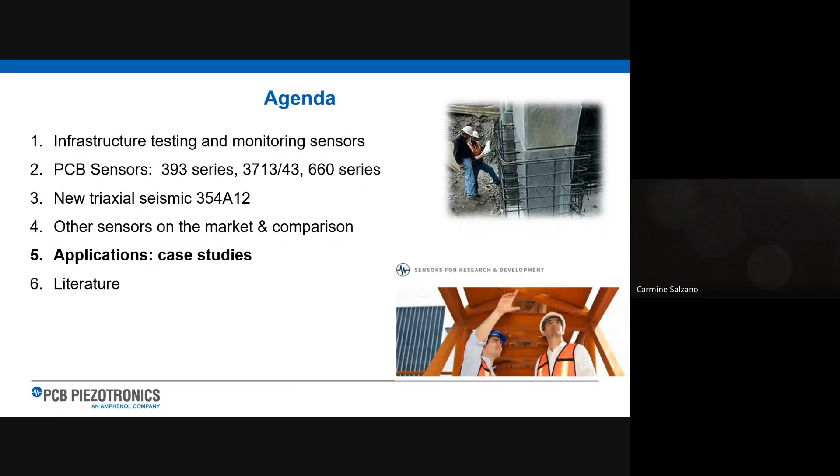Then we will have point four, a very quick overview of two of the most common other sensors used in this kind of vibration test and monitoring in the market. And then, as I said, we will see 26 case studies. So it's quite long because of these 26 case studies today.

Okay, so the first part is obvious. Why we do these measurements in infrastructure. There are many kinds of reasons why. First, to test infrastructure, or maybe to perform monitoring. You can imagine on some monuments, or for seismic, or maybe for certification, or even simply for research scope. So there are many reasons, I would say very important reasons.

The question is which kind of system we use for measurement. We use typically a sensor with a cable and data acquisition. Of course, I will concentrate on the type of sensor, because the sensor is the one that transforms the oscillation into an electrical output, which can be read easily by any data acquisition.

I hope it's enough, or should I speak slower, Nicholas? Should I speak slower? Maybe a bit slower. A little slower, okay.

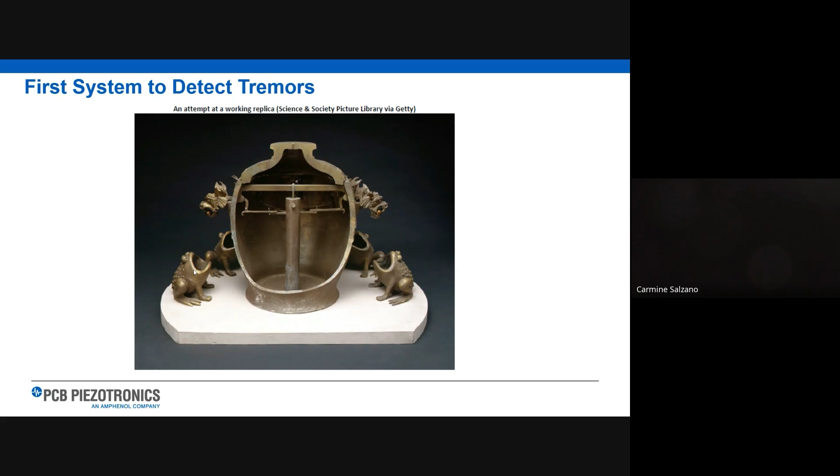Well, after a few days, the time for a guy to move by horse from one city to another, he arrived and announced there was an earthquake a few days before, exactly at the time when the ball dropped. So as you can see, this is just a curiosity about where the first, let's call it, sensor was developed. Of course, today we have different types of modern technology. I will concentrate on a couple of technologies only.

First of all, the piezoelectric one, which I hope is familiar to most of you. We have silicon dioxide, mainly quartz, or other ceramic piezoelectric materials, which, when we have a force acting on them, like an acceleration, generate an electrical output.

This electrical output is high impedance. So typically we have a MOSFET, a microcircuit inside the accelerometer, to convert to low impedance voltage output. And this is one of the most common. We have another technology which is capacitive, we'll see later.

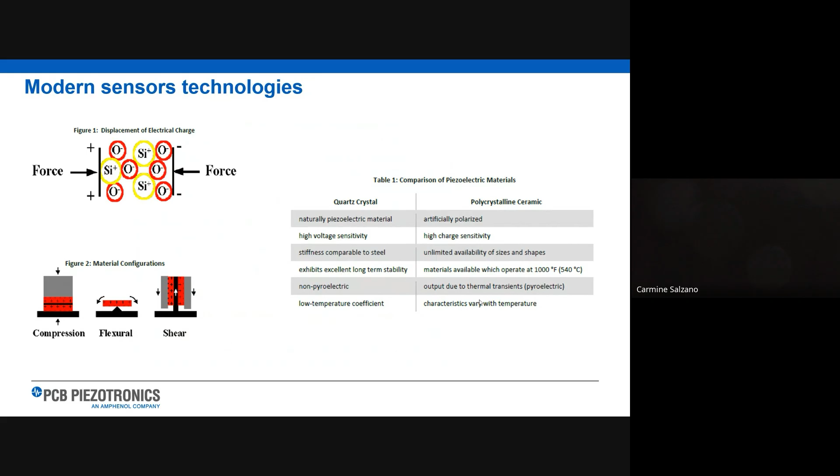The piezoelectric is especially for this infrastructure where we don't have associated high temperature above 120 degrees Celsius. Then in this case, an ICP sensor with the electronics inside and low impedance voltage output is very, very common. Most of the piezoelectric sensors, which are very robust, can measure in any type of infrastructure at a very low level, which means they can reach very high sensitivity to measure down to, let's say, micro G.

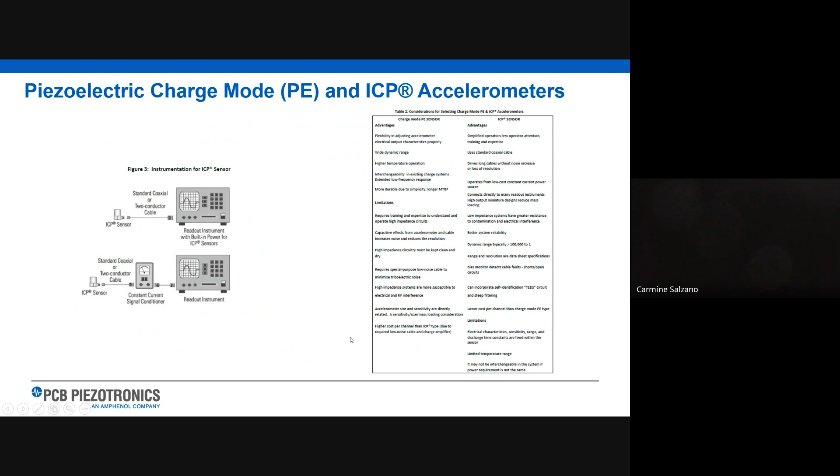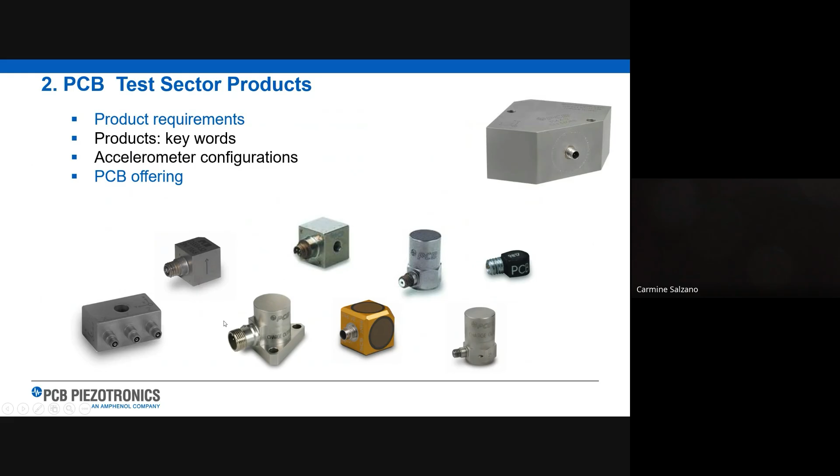What does it mean? If you have an accelerometer which is able to measure down to micro G, it is already good for most of our needs. Maybe not nuclear tests, but all the rest are fine.

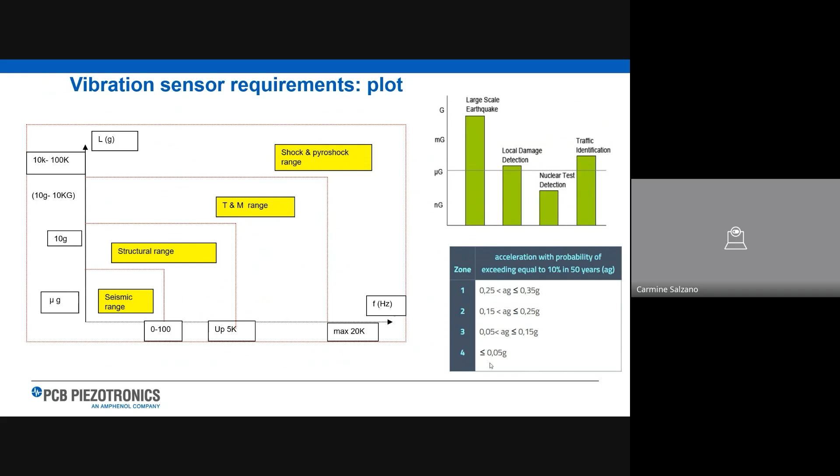Then I found another interesting plot, another interesting piece of information here on the right side, bottom, because these are the acceleration levels which buildings in a seismic area in Italy, for instance, need to resist according to law. So as you can see, the minimum is 0.05 G. So in this case, there's no need for seismic monitoring and tests in these seismic areas to measure below 0.05 G. So not even micro G. This is very important information, at least for the level of vibration to measure.

Because look at this. If you want to make a list of requirements, of course, we know that it's maximum 100 Hertz and the G range is for sure not below micro G. The frequency, I already mentioned, maximum a few hundred Hertz, but the question is, do we really want 0 Hertz, or do we want very close to 0 Hertz?

Remember, we are measuring motion. We are measuring a structure, can be a big building, can be a bridge, can be anything which is big and is moving. When it moves, you have a frequency even very close to 0 hertz, but you don't have 0 hertz. And therefore, most of the applications we can cover not with the capacitive sensor technology we have, but with the piezoelectric ICP.

Another important thing is robustness. You can imagine a hermetic sensor, or if not hermetic, exposed during monitoring. Then robustness is also important for shock, because if you drop a high sensitivity accelerometer on the floor, you can break it. The size is not so important. The price, of course, depends on the number of channels we need, if it's a test or if it's monitoring. And then, of course, the ability to use long cable.

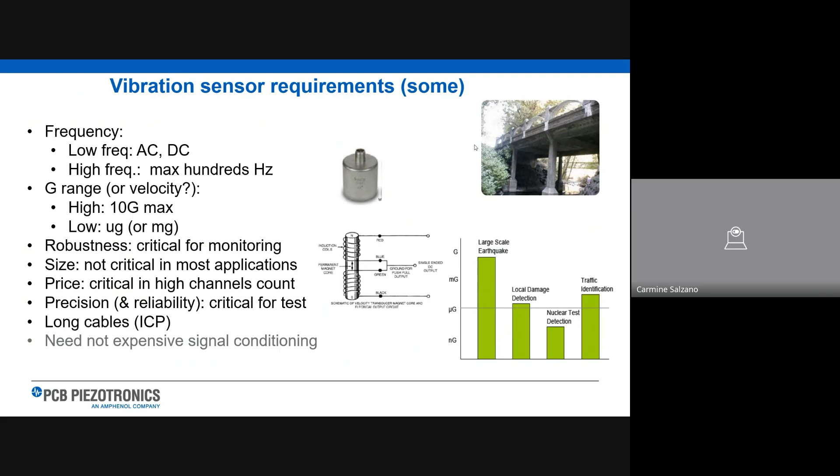Now, why do I call it micro vibration? Because it's the accelerometer with high sensitivity. High sensitivity, we talk about from 1 volt to 10 volt per G, able to measure down to micro G.

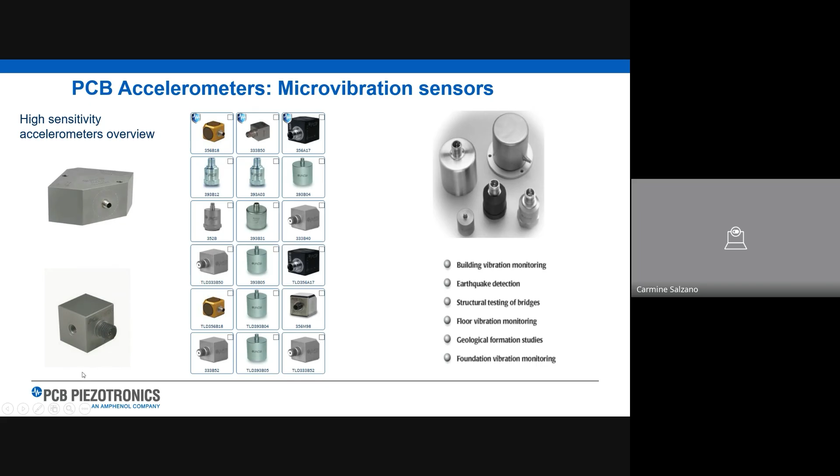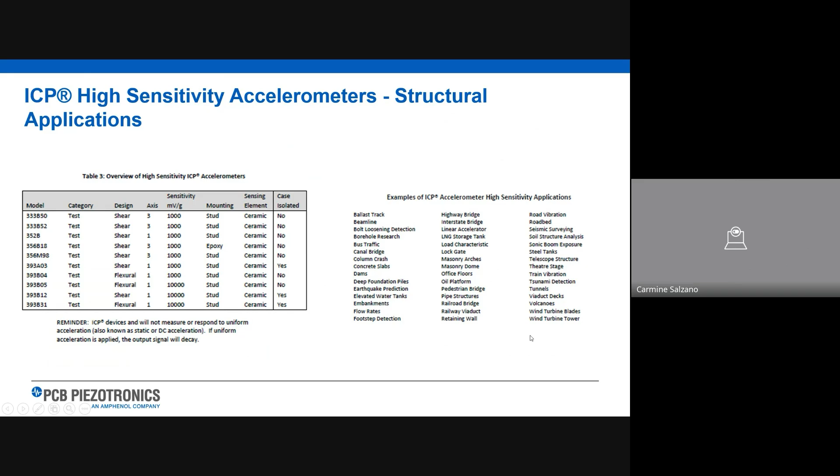As you can see, most of the applications of these sensors I show you are in civil structures. Can be traffic jams or dams or buildings or infrastructure like viaducts or tsunami or railroad. We have many infrastructure applications. And of course, these are the primary standard off-the-shelf single axis accelerometers. You can see typically 1 volt per G, 10 volt per G.

You can see the frequency, 0.06 hertz. So really close to 0 hertz. You can measure, I would say, every type of motion. Of course, at 0 hertz displacement you are not able to measure. Otherwise, you are able to measure down to micro G level.

Okay. And this is brand new. I would say this development that was released this year is a triaxial accelerometer. You can see the size. The size is very small compared to using 3 accelerometers of the same size. You could use these 3 axes instead of this one. That's why it's very convenient to use this accelerometer.

You can see the size. And the level is 8 micro G, already mentioned. So you can measure from 8 micro G, and you can see the frequency, even 0.06 hertz, which means most of the motion in the infrastructure you can measure in the 3 axes. This is really the new one that we have today. I am pleased to present it, probably for the first time in a webinar, officially released today in a small number of pieces. In the future, as production goes ahead, we will have a large quantity available.

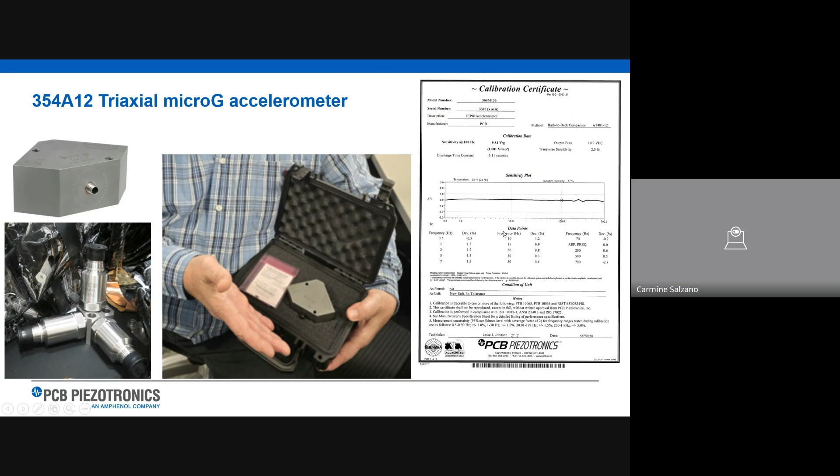However, we have the opposite. We have some very small sensors, very low price, 1 volt per G, this accelerometer here, naked. Just the accelerometer itself, it needs to be protected in a case. But the price is very low because it can be embedded in any application. Of course, this is primarily for monitoring, not for testing. But sometimes when you want rough results but in large quantity, you can use this one.

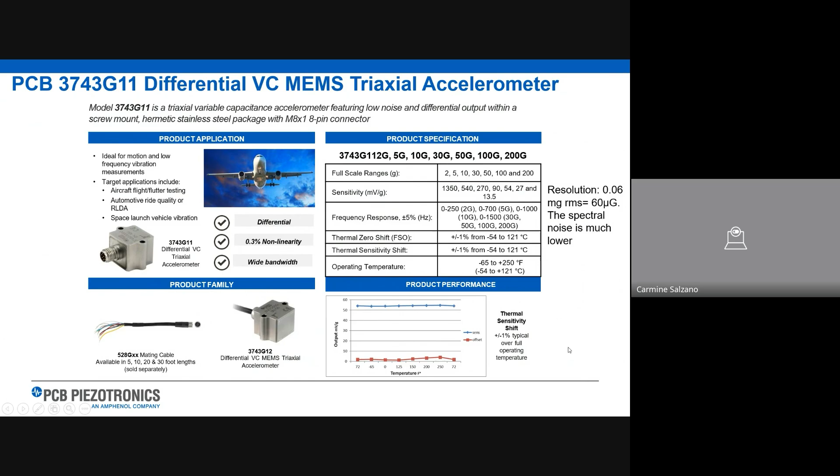And this is one of the latest, the triaxial, which can work single-ended or differential. We don't have time to explain the difference, but it is an accelerometer measuring from 0 hertz. And this is 60 micro G resolution, so the minimum level. However, the triaxial piezoelectric is 8 micro G, so one order of magnitude of difference. Of course, I will not mention force sensors and other sensors like strain sensors, because these are sometimes part of the 26 different cases I'm going to show.

Now, before going to the 26 different cases, let me show you the two typical ends, two typical sensors. The low end typically uses a geophone. Every geologist probably uses this geophone, which is really rough.

The cost is very low, but it is very limited in frequency. Any frequency they can measure, it just gives an idea. Our sensor, I showed you before, the embeddable one, has a better characteristic and probably the same price level, not exactly the same price. So eventually you can evaluate the embeddable.

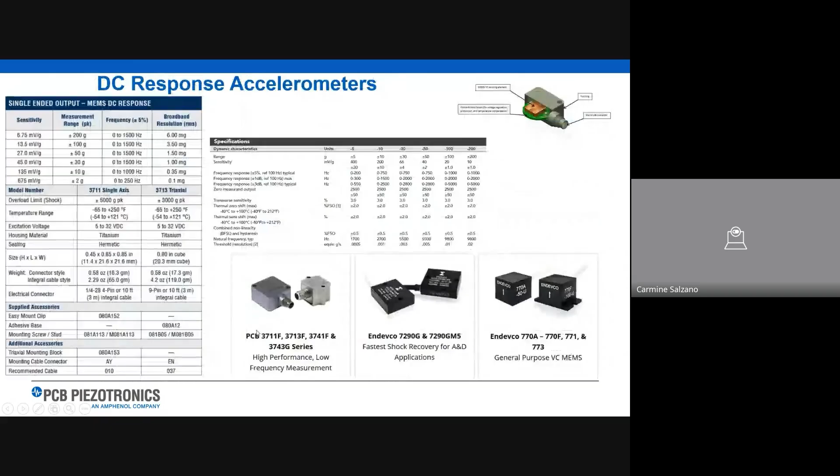Okay, I hope there is no urgent question, because now we go to the last and the longest part of this presentation today. Nicolas and Nico, any comment?

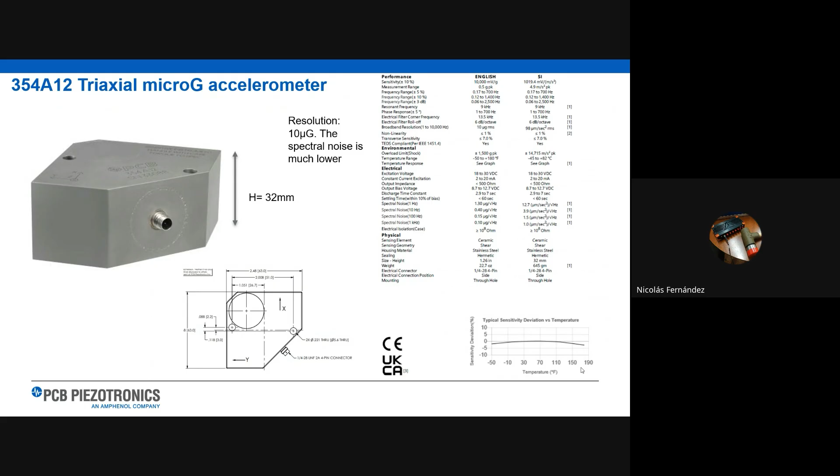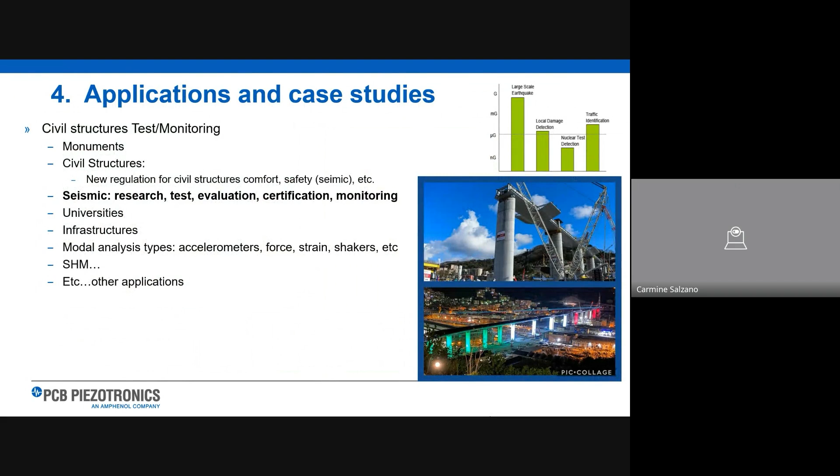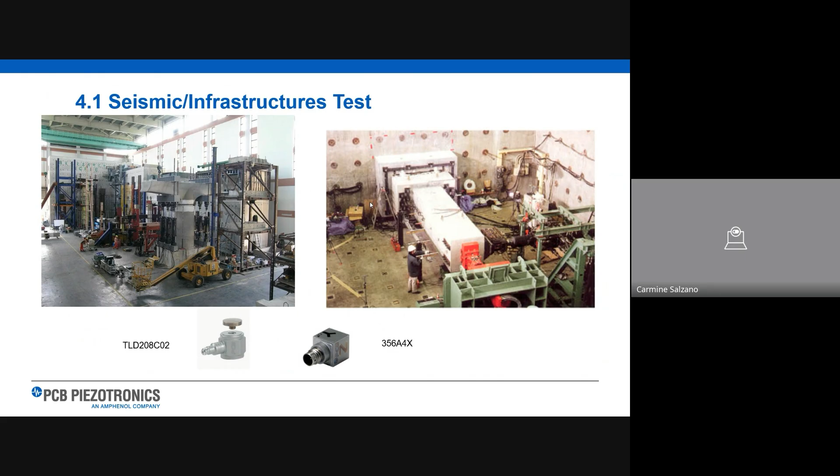Okay, now we see the application. Yes, many applications. The first one, obviously, is a test in infrastructure in a typical lab, right? It can be a testing lab, or it can be the lab in a university. In this case, of course, you need a typical high sensitivity accelerometer, but also a force sensor, a sensor that is able to measure with the same ICP technology the dynamic force. Because of course, in the modal test, you need to excite the structure, it can be a sledgehammer, it can be any device, and then measure the force you give, and then the accelerometer to measure.

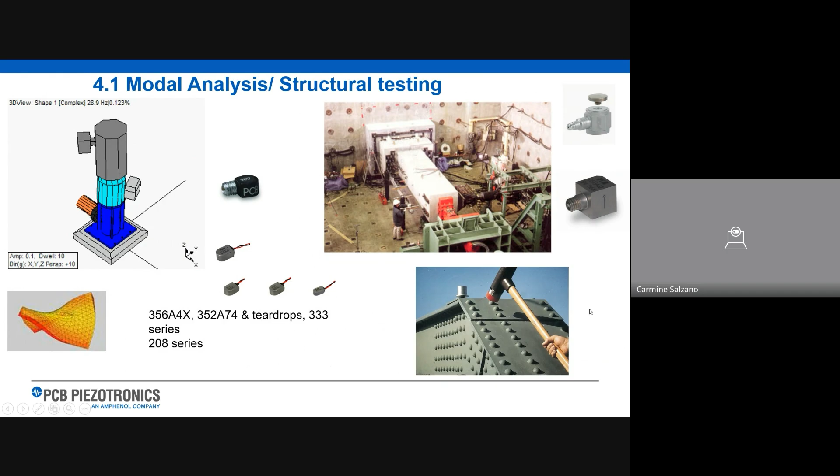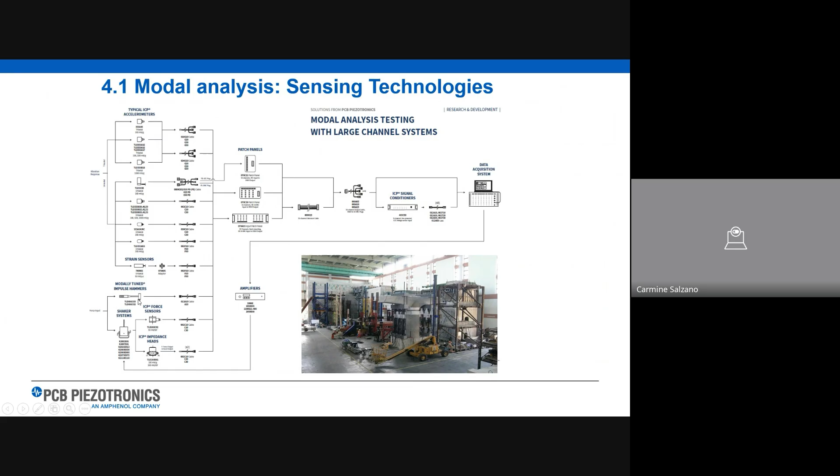And this you can imagine as a pump or any structure. You can see the sledgehammer to excite the structure, and the accelerometer doesn't need to be 10 or 1 volt per G, it can be even 100 millivolt per G to measure the response. And of course, we have plenty of these sensors. This is a very general introduction, because the excitation method can be hammer or shaker. All these sensors are manufactured by PCB Group. You can see the shaker is the best, I would say, excitation in the modal test, and then different types of hammers.

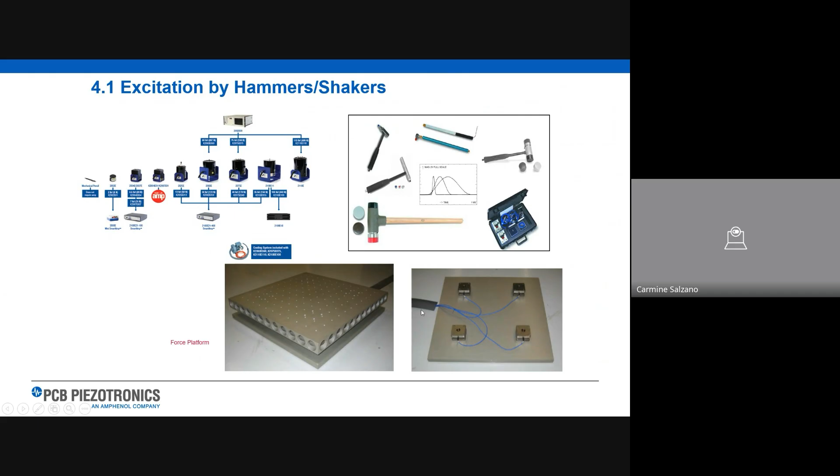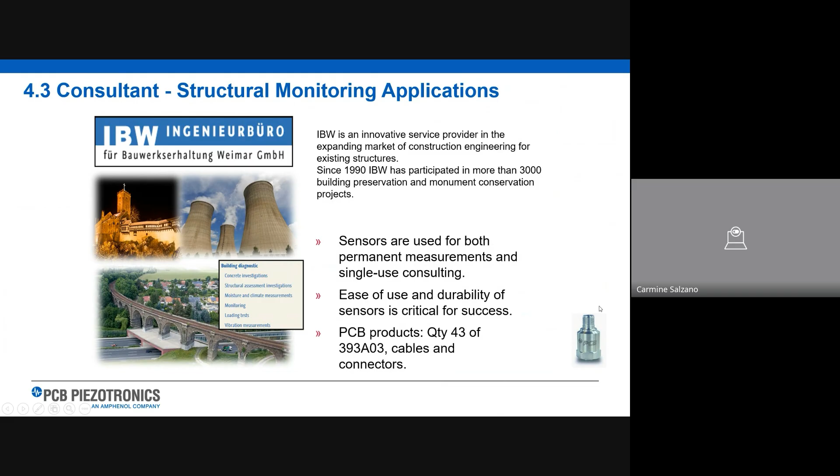These are real applications. Another real application is very common: this consultant in Germany used 43 accelerometers for permanent monitoring during consultation on building preservation and monument conservation projects. As you can see, these are very common applications in any country, not only seismic countries, but every country that wants to preserve its monuments.

This is in the US now. This is the most equipped monitoring building in the world. It is covered by a paper. You can see the link of the paper. When I send the presentation to Nicholas, he will send it to you.

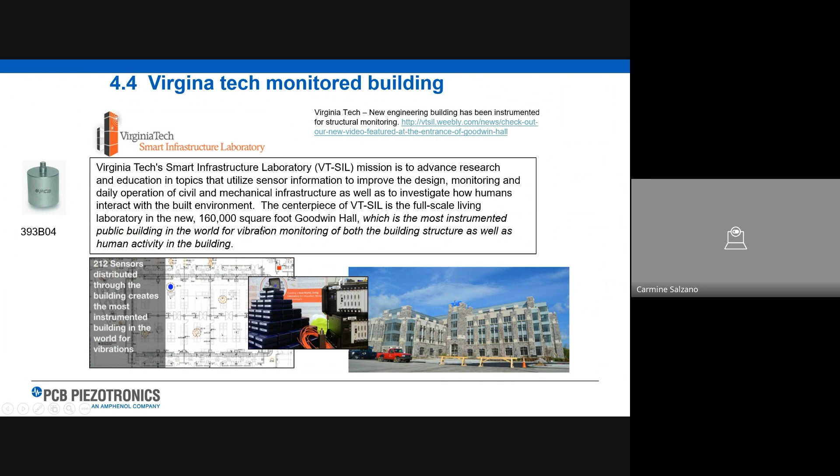In this presentation you will see the link and can download the paper. You will see that they use 212 of the 393B04 from PCB, 10 volt/g, for permanent monitoring of this structure, which is a big structure of Virginia Tech. So very big. You can imagine the 160,000 square feet of Goodwin Hall. So a very big structure, permanent monitoring.

From this building, we go to another building, in Italy this time. I don't know if you remember, 20 years ago, something like that, there was a big earthquake in the middle of Italy, and the student house collapsed. And then there was a new building for the student house. You can see the pillars.

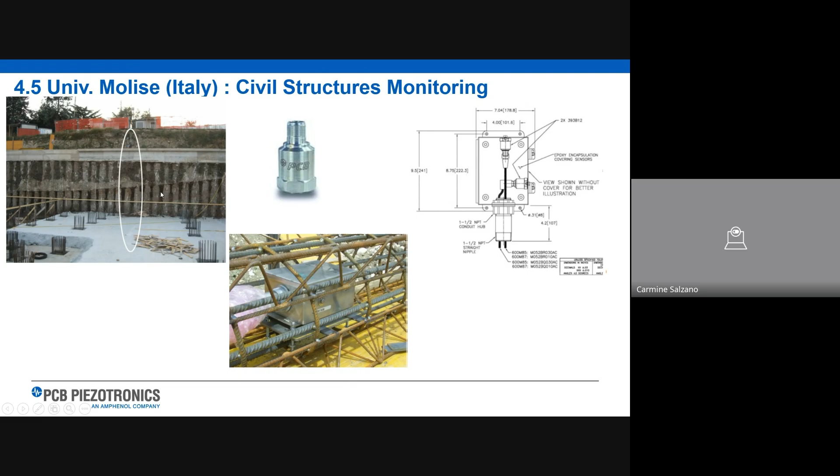In 2 pillars, we decided to embed 2 of the 393B12, 10 volt/g, very robust with MIL connector, in a box in a pillar. This pillar was injected with liquid cement, which then solidified, and it's still there measuring the level. This is a paper you can find on our website, which I contributed to, because I followed the project of these 2 accelerometer units measuring 2 axes in each pillar. And still today, after 15, 20 years, it is still working.

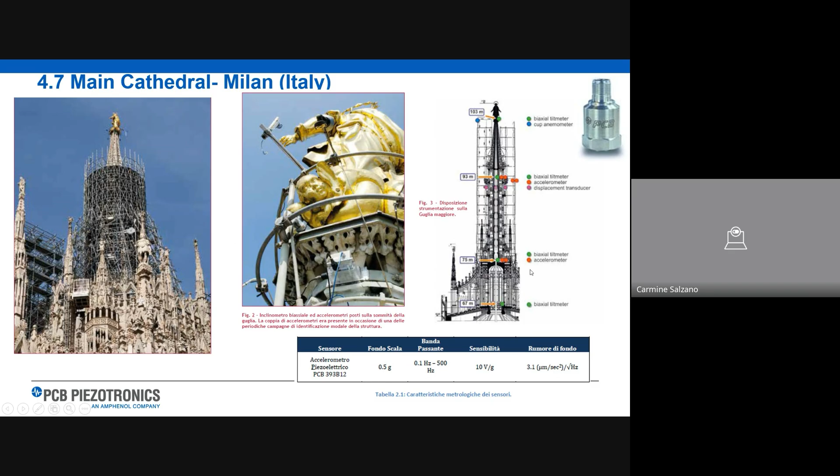But another very popular, probably the most famous monument is the main cathedral in Milan. You can see the statue of the Mother Mary needs to be monitored. We have this accelerometer 393B12, again, used by the consulting engineers to measure at different levels of the column, including the Mother Mary, for permanent monitoring of, I would say, this tip of the church.

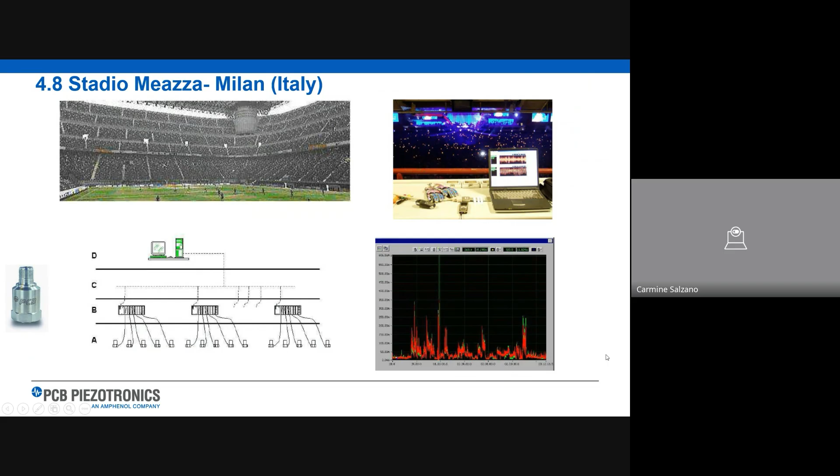Still in Milan, but this time the football stadium, but they used the 393B12 not for monitoring during a football match, but during a U2 concert, a rock band concert. During a concert, you can imagine how many people jump, and they used this accelerometer to monitor during the event, to make sure that the structure will not be overstressed.

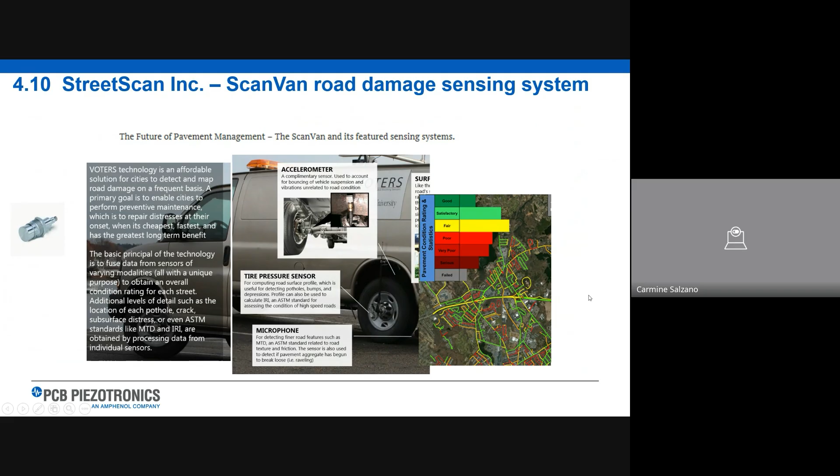Still in the US, but this time for road assessment, using not only the accelerometer, but also a PCB 106 type pressure sensor inside the tire. Because of course, the tire pressure changes due to vibration when moving on the road. So with different dynamic pressure measured, you will have a different condition of the road, and then you can map the status of the road with different colors. That's another very interesting application from one of our customers in the US.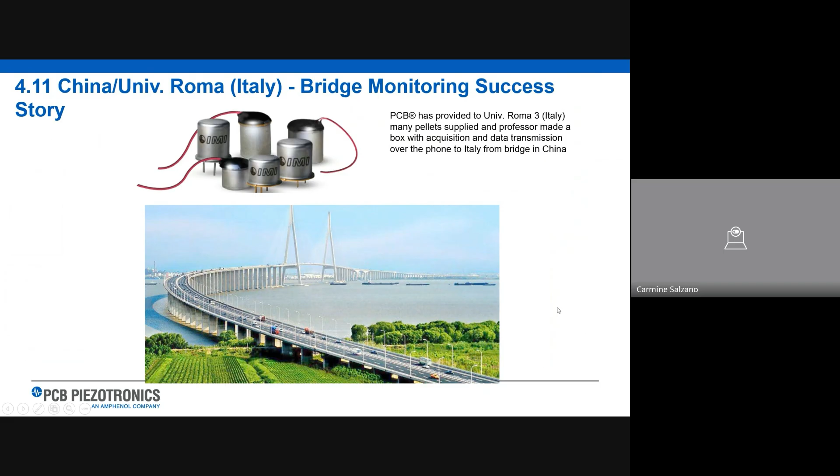Still in Italy, but this time on a bridge. This is a paper you can Google and find, as I did, because I was not aware. I simply Googled it, and I found that this bridge is very big, on the biggest motorway in Italy. Using the 393B12, the modes were found. And this is very interesting because for this large bridge, the minimum frequency is 0.93 hertz.

Well, I would say this probably is the best proof of what I said at the beginning. So even for a large bridge like this one, the minimum frequency is 0.93 hertz, which means that usually you don't need a DC accelerometer, right? We have the DC accelerometer, but in this case the minimum frequency of 0.93 hertz can be easily monitored and perfectly measured by this 393B12, which is a dynamic ICP accelerometer starting from 0.15 hertz.

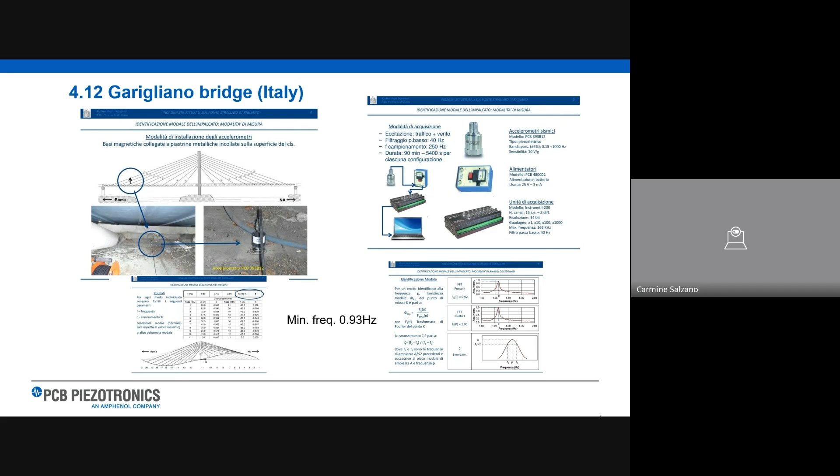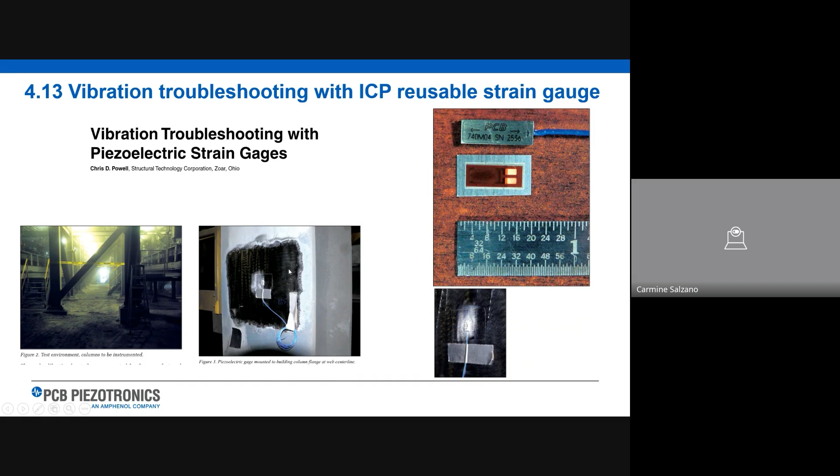However, this sensor is, I would say not hermetic, but epoxy sealed. Inside you have a quartz plate. So mounting on two opposite flanges of each pillar, they assessed the status of the pillar during construction work. And these are the results. One column on the left, this one is a column. You can see the time, and this is a zoomed time history. You can see the two sensors, red and blue, have the same frequency and the same level. Therefore, this is clearly axial loading of this pillar.

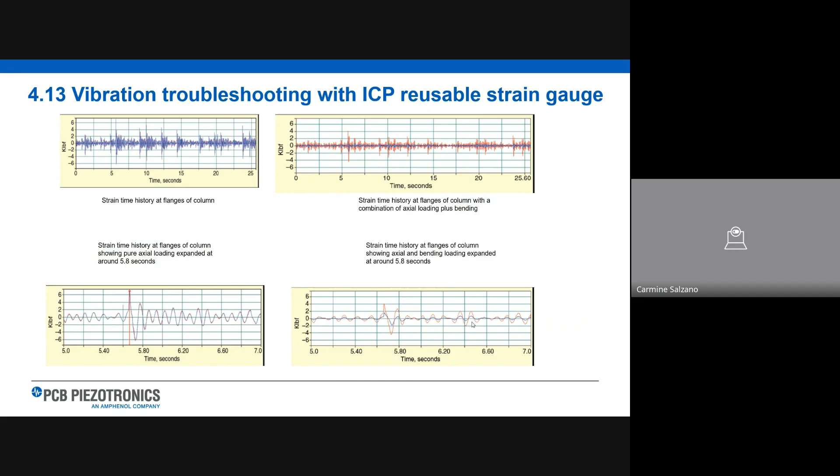Another pillar with the two strain gauges on two opposite flanges. You can see from the zoom, you have the same phase but different amplitude. What does it mean? It means that this pillar has axial and bending loading. So a very interesting application of this strain gauge.

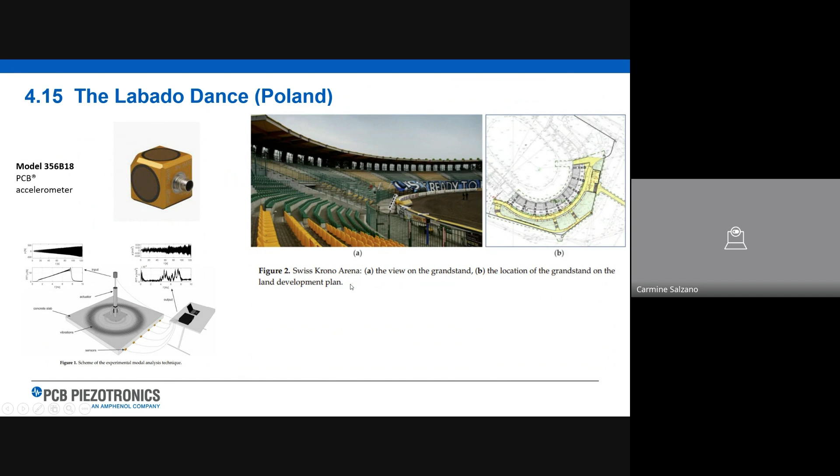Now we go to Poland. This is a Labado dance. This is a speedway race, and people dance a Labado dance, which means they hold their arms on each other's shoulders, so they are all jumping at the same time. You can imagine hundreds of people jumping at the same time, how dangerous it can be to excite the resonance of the structure. In fact, they used a 356B18, which is only 1 volt/g, not 10 volt/g, because you don't need to measure down to micro-g, milli-g is enough, since there are really some g during this Labado dance, right? So it was important to use many of these 356B18 during the event in order to control that no problem happened during the race.

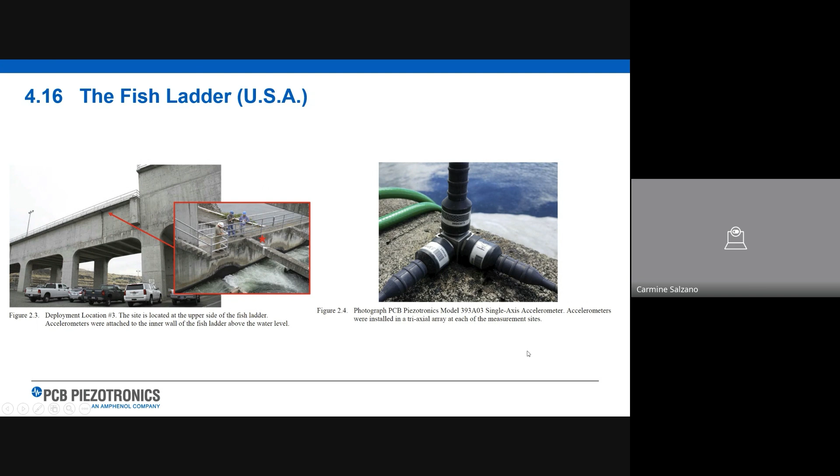Now in the US, there was another example. This is a dam. The dam was important because there were salmonids moving in the area. During maintenance of this dam, excessive vibration could disturb the salmonid navigation, right? So there was a triaxial arrangement, three single-axis 393A03 accelerometers, used here at the point with the red star, so that when the level of vibration during construction is too high, they can stop construction work so the salmonids are not disturbed during their navigation, because they want to make sure the salmonids can navigate, create eggs and grow up to be eaten, right?

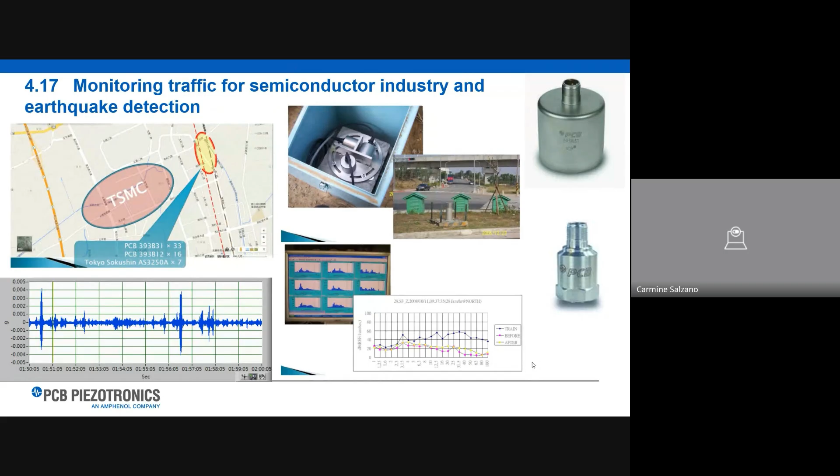So it's an excellent, I would say, multi-application case, because with the same sensor we are monitoring the railway traffic, the car traffic, and an earthquake in order to prevent any problem with semiconductor manufacturing. So it is an interesting application and covered by one of my papers on the website.

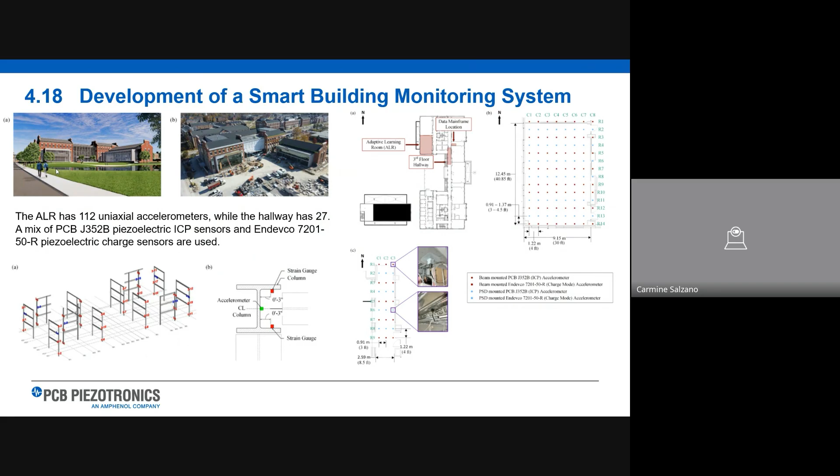Go back to the university in Tennessee in the US. They use 112 accelerometers. In this case, the accelerometer is 1 volt per G, and they use this large number for monitoring for two reasons. Structural health monitoring, and the other reason is human vibration, I would say the steps of the people, hundreds of students in the university moving around, which of course cause vibration. And they want to measure also this one.

They use these two sensors, strangely, one ICP and one charge output from Endevco. These are the systems they use for this permanent monitoring of the Tennessee University engineering faculty.

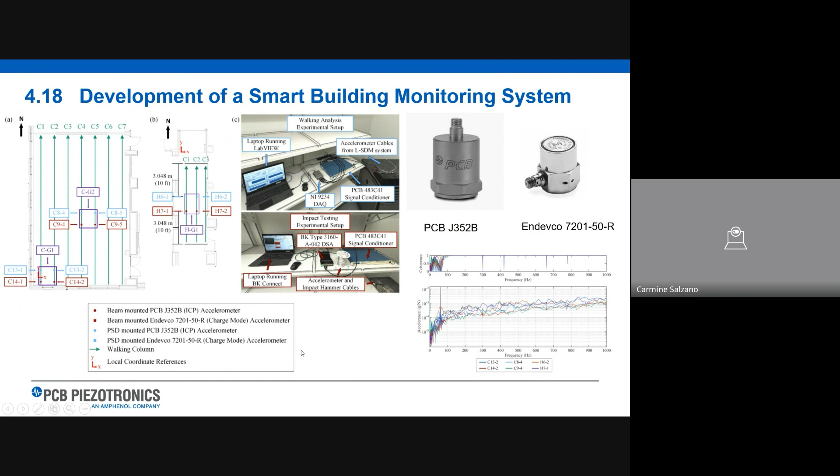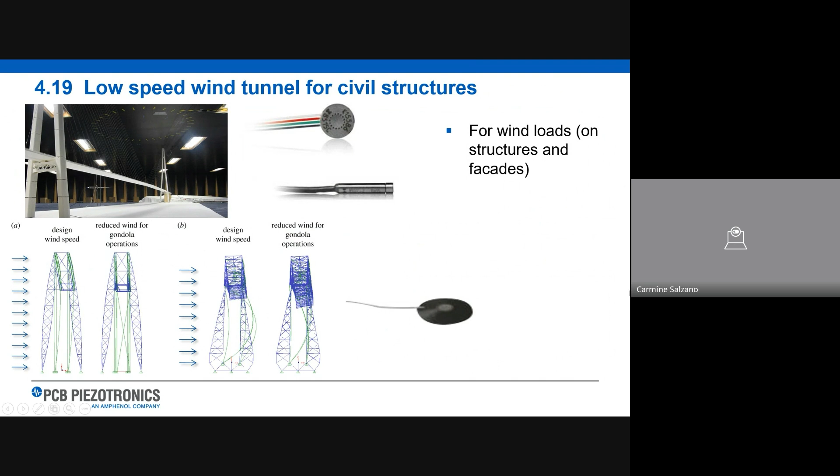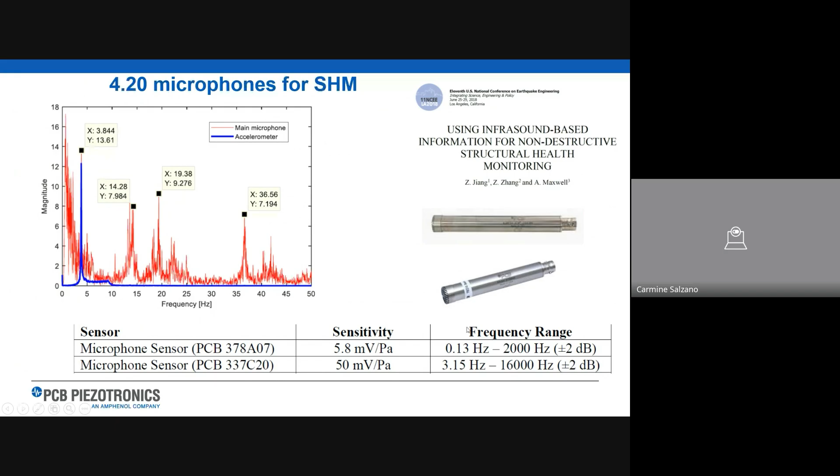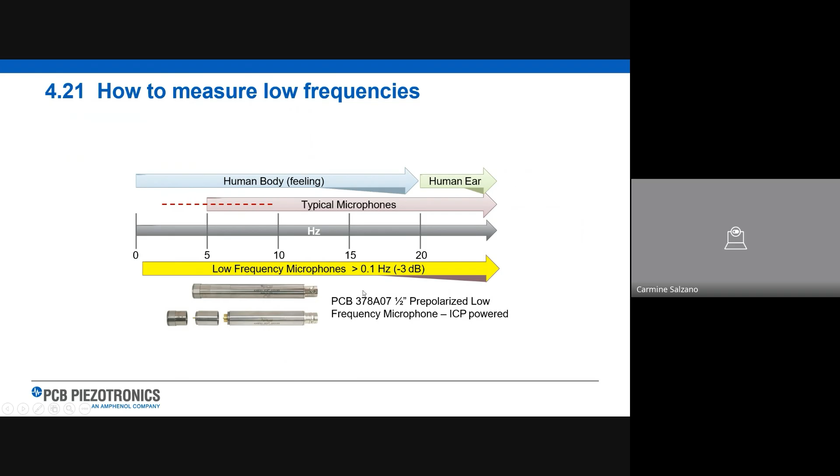But these low frequency microphones from PCB, since they can measure down to 0.1 hertz, can be used for many other applications by non-contact measurement. For instance, tornadoes, typically in the US, or wind farm noise, this is everywhere, volcanoes, right? Of course, nuclear, because all these events are very low frequency, much below the human ear. So having this type of microphone, they can easily be measured.

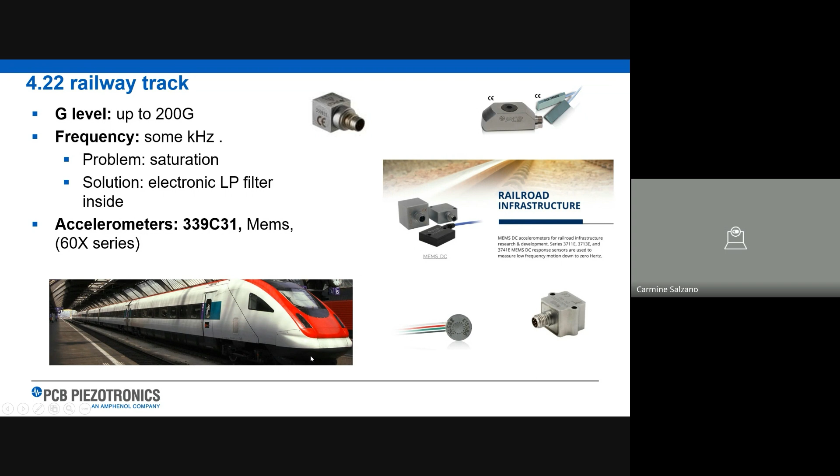On railway it's a different one. We don't need the micro G. In this case it can be some level of G's during passage of the train. And in this case, you can use any typical accelerometer, ICP or MEMS, for measuring not only the vibration, but also the pressure during the tunnel entry of the train, high-speed train.

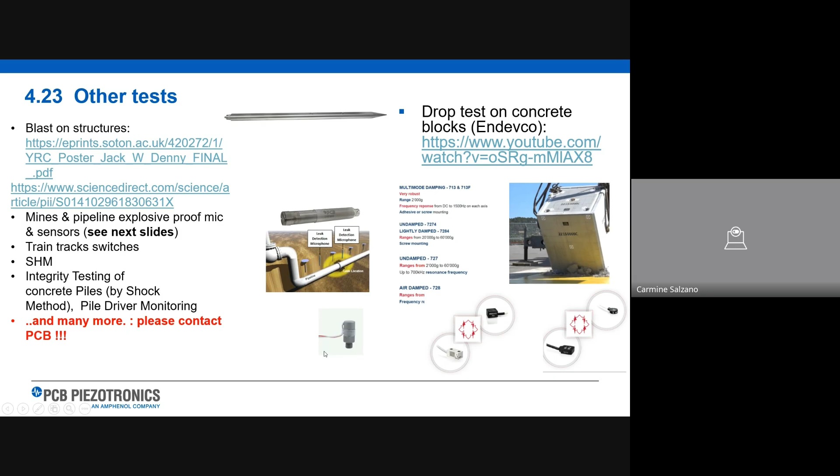There are many other tests. These are a few examples, but I don't want to go through each detail, because otherwise we have no time for questions. Also, do not forget MEMS accelerometers are typically used for traffic on the car to measure the event in the car.

But also we can have a simple device. We don't want to use the full software, of course, because these are simple one channel, two channel measurements, for this Digiducer, which is a device which not only powers ICP, but also converts data to be measured in a smartphone. It's a very simple device for general survey.

The last, of course, since we are in Chile, I would like to suggest which type of sensor can be used in mining to measure during an operation, during a blast, right? Well, first of all, we can use a pencil probe by PCB to measure the air free-field blast, and we can use high-level microphones up to 180 dB. For the miners, you can use the vibration meter, but also the dosimeter to measure the level of noise in the ear.

Also remember that as a microphone, we have the only explosion-proof microphone in the world. So this microphone can measure even underground to see any problem, right? Because in any explosion area, it can easily measure without any problem. And finally, of course, the infrastructure close to mining during a mining operation. This triaxial is excellent for this purpose. For instance, a building close to mining.